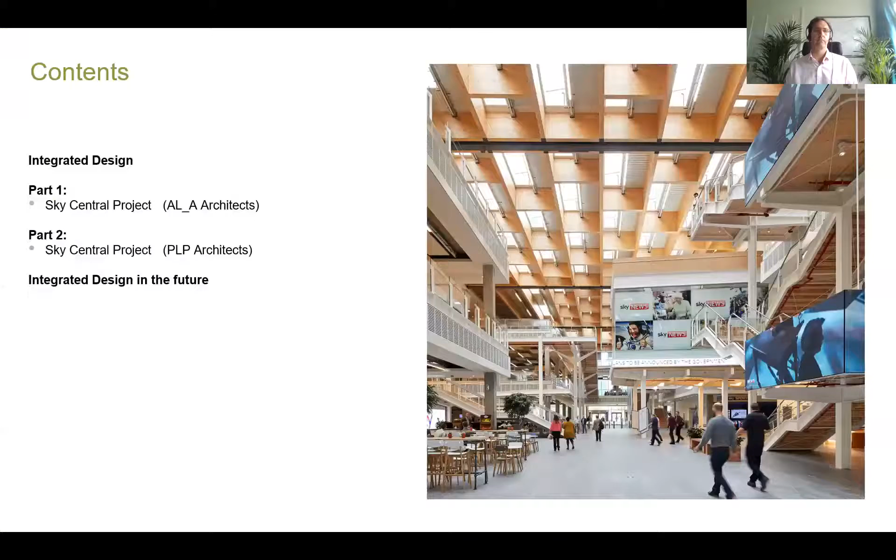For Vaz and I, integrated design has got to start with Ove Arup, the founder of the Arup practice. Ove, as well as being an excellent structural engineer, was also a passionate philosopher. Ove Arup delivered a talk in 1970 to the founding partners of the firm, a time when perhaps integrated design was less common in construction.

In that talk, he was responding to the collective desire for all the facets of the firm to continue to work together, despite the changes that would occur in time as each founding partner retired. In that speech, he refers to both integrated design and total architecture.

And the particular element I like is the term total architecture implies that all relevant design decisions have been considered together and integrated into a whole by a well-organized team empowered to fix priorities. This is an ideal which can never, or only very rarely, be fully realized in practice, but which is well worth striving for, for artistic wholeness or excellence. And excellence depends on it, and for our own sake, we need to be stimulated to produce by excellence.

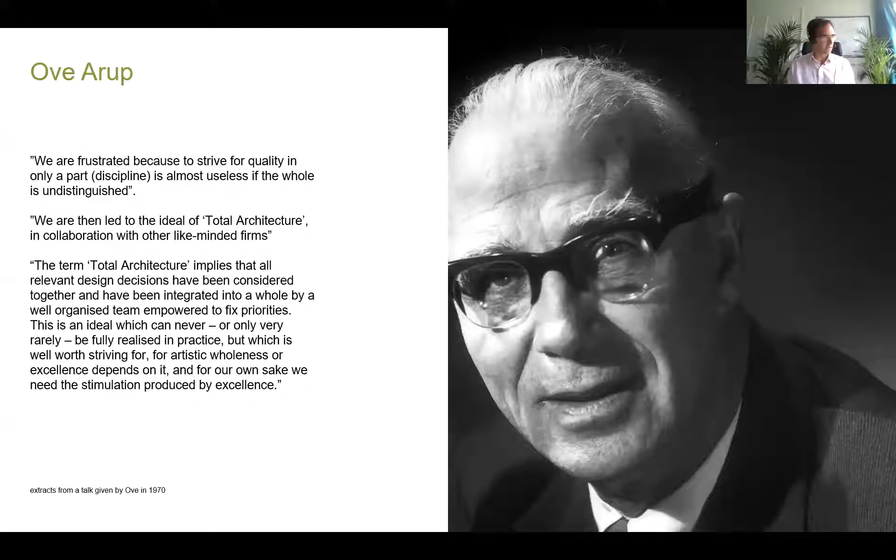So, integrated design - what is it and where does it come from? Everyone likes a great diagram, so Vaz and I considered how on our projects integrated design comes together. What is it? It's synergies, balance, whole, completeness. This isn't a universally accepted thing to have integrated design on projects - some believe that actually integrated design can be time consuming, risky, complicated, almost impossible, or slow.

It's important, therefore, that integrated design or total design delivers outcomes that are greater than the sum of those individual parts. I'm sure over the course of studies those on the call have come across studies on integrated design. Vaz and I thought we would share and capture the key components that are fostered on integrated design on our projects, which come through on this diagram.

We feel it's important, first of all, technical skill - to be the best that you can be as an individual in your core discipline. Be creative and innovative. Treat each new challenge with an open mind, not burdened by one particular solution you may have come across on the last project or otherwise. That doesn't mean forgetting your experience and knowledge gained over your career or past projects. Strive to come up with the best solutions for the brief, have ownership for the proposals that you make, and don't be frightened by innovation.

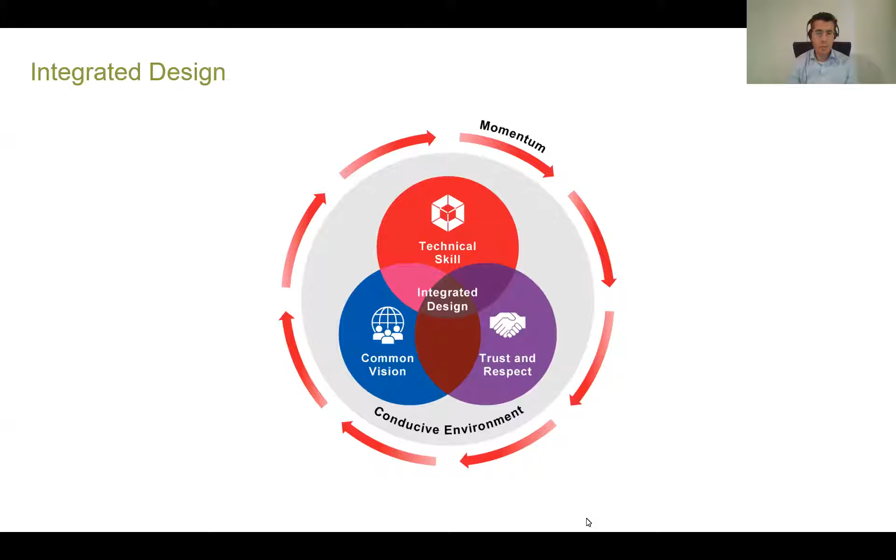So, Sky Central is a project we completed a few years ago, and we would like to share with you the design journey, and how the integrated building design concept was formed.

Our client, Sky, has spent 27 years making TV. They were first to offer digital TV, and now have over 34,000 staff in over 130 locations. They have been investing in making places where people work brilliantly across the UK and Europe.

But in Osterley, where they are currently located in London, is their headquarters. It is where 'Believe in Better' started, their motto, their slogan. So they wanted to create a headquarters that everyone, no matter where they are based, could be proud of.

So why was integration so important to visualize that vision? Because the client, Sky, have complex needs which sometimes conflict with each other. So the question is how we can satisfy those needs in a seamless way, how we can maximize the potential of the client's vision, and how we can enhance each other's aspirations - the architects, the client, the engineering aspirations.

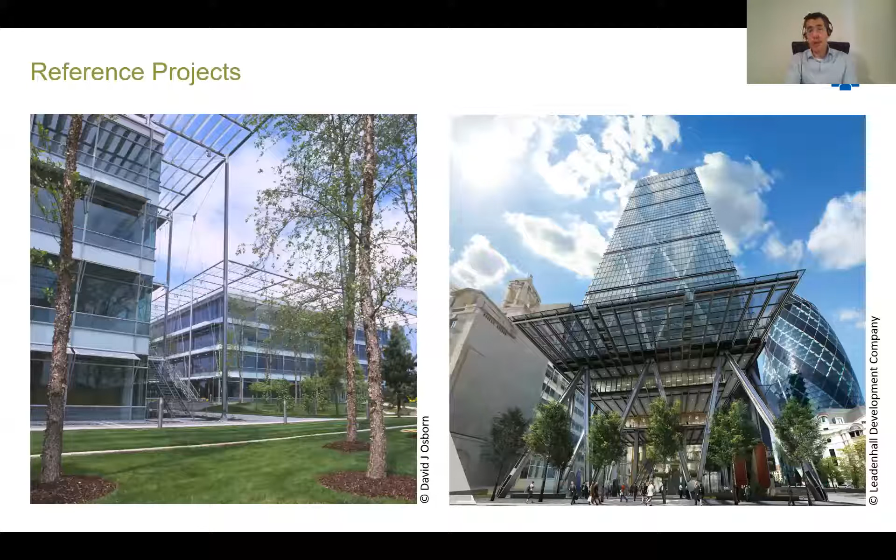What they had in mind was a Bürolandschaft type of office. Here in this image, we look at Johnson Wax headquarters, an open plan office that accommodates free and open plan furniture scattered in large, loosely and unstructured divided spaces, less rigid, with creative partitions and plans, the nature of them often dictated by the type and functions of the workers being there. The challenge was that in an arrangement like that, an open plan arrangement, it is difficult to actually celebrate the structure and conceal the services.

It's difficult to bring daylight. It is challenging to actually create a connected environment. It can look quite cramped.

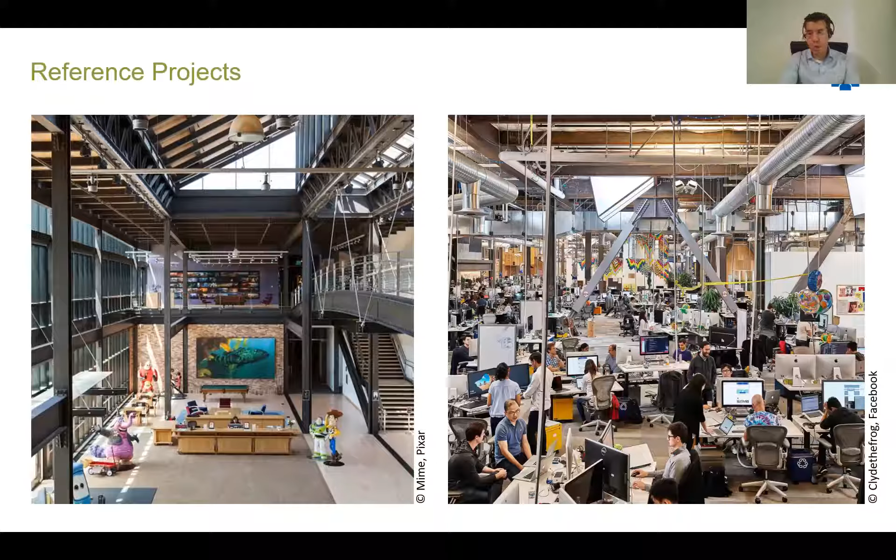And so they traveled to the States to look at similar large-scale office facilities from the creative industry. They visited the Pixar building and Facebook headquarters, which were converted factories powered from the sun via photovoltaics with daylighting coming from the roofs. Although they liked those type of buildings, they were concerned with the inhumane nature of those large buildings and the large and long floor plates.

Before going to unfold the story of the design, I will give a high-level summary of the design solution, just to give an overview. In Sky Central, we came up with a very long, but a very low-rise building, only 3 stories, a landscraper rather than a skyscraper.

We designed the largest timber roof in Europe, 16,000 square meters, which integrated skylights, areas at high level where we could collect the hot air, and 12,000 square meters of photovoltaics on the roof to generate electricity. We allowed the daylight to penetrate from roof skylights and percolate down to lower floor levels via a series of atria scattered in the floor plates.

We did the opposite with ventilation. We bring fresh air into the space from the floor and allow the air to rise up to the ceilings. By adopting this approach, we managed to clear up all services at high level, celebrating the structure.

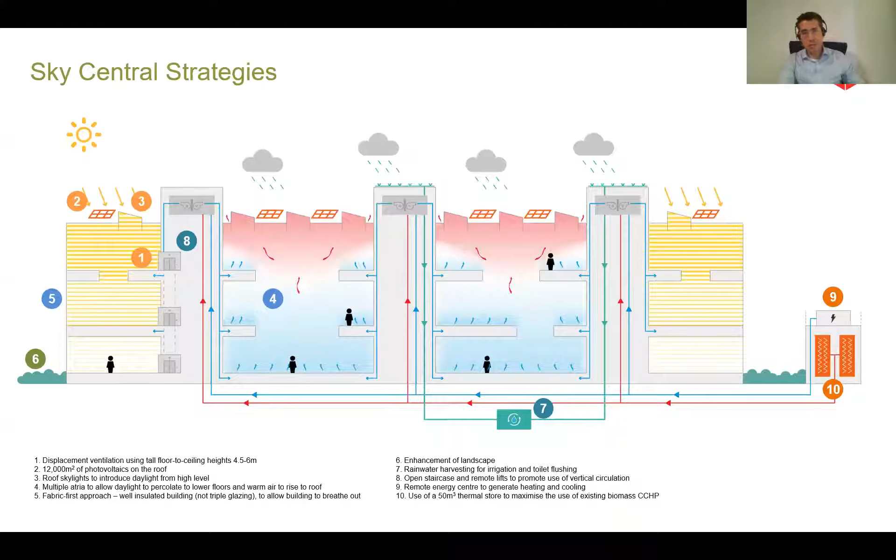We will now see in the following slides how we slowly unfolded the design of that solution. So ALA's vision, Amanda Levete Architects' vision, and response to Sky's needs and concerns was to create neighborhoods within the building to provide some demarcation for the vast landscape floors.

With that in mind, the use of atria came up to break the long floor plates, as well as to create vertical sight lines from one floor to the floor below or above. That was a vision that all design team members shared.

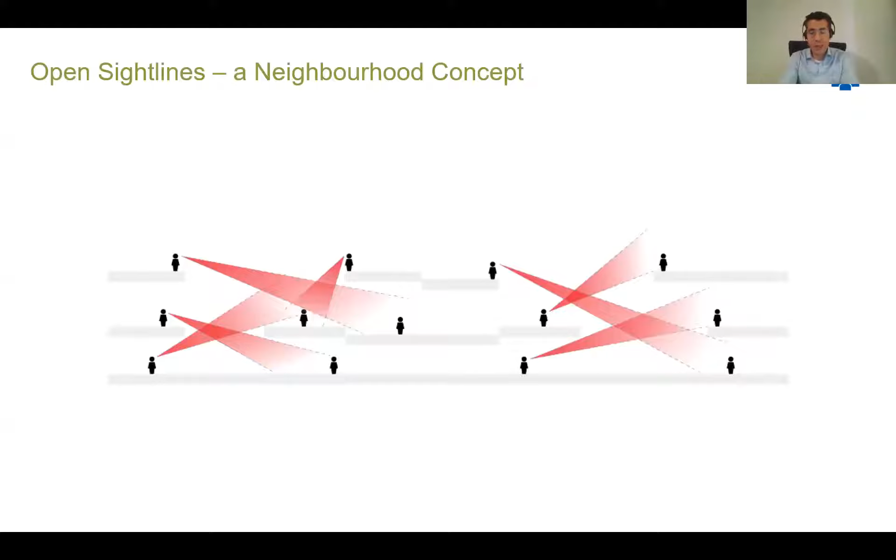In a way, it was a piece of a Jenga game of office, aiming to optimize the location of that atria to actually get the most out of daylight, ventilation, and sight lines, so provide ease of connectivity between the floor plates. And so, from an engineering perspective, the first idea is to bring daylight from the top to create

a fully daylit space at the top floor, and then utilize multiple atria to bring daylight to the lower floors. They would not be as daylit as the top, but the idea is that every floor has access to daylight and is able to see the sky.

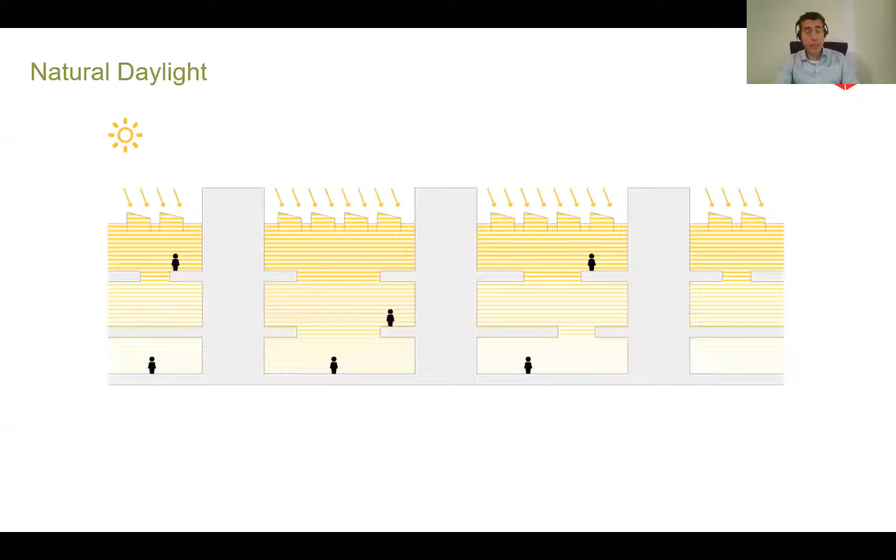Punching skylights through the extensive roofs allows maximum penetration of daylight into the building, providing even dispersion across the floor plates, as we see in the next slide. Floor openings are distributed throughout the first and second floors, increasing in quantity as one ascends the building.

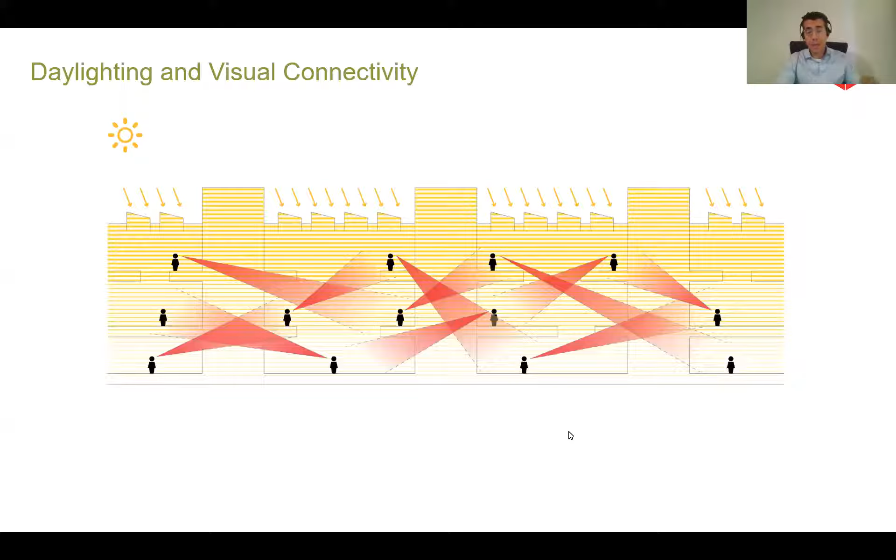In the next slide, we see here how these atria permit visual connections across the large expanses, vertically as well as horizontally. Moreover, it allows the natural daylight from the roof lights to percolate down through the roofs, through the floors to the ground floor.

The next challenge was that in an office space of a TV broadcasting firm serving 3,500 people, the workstations are heavily used. Each employee has 3, 4, sometimes 5 screens, which generate a lot of high internal loads. And that poses a significant challenge on how to serve those desks.

This means that the floor void was pressurized with air. The displacement system would then be responsible for dealing with heating, cooling, and ventilation, and therefore it removes all HVAC services from high level.

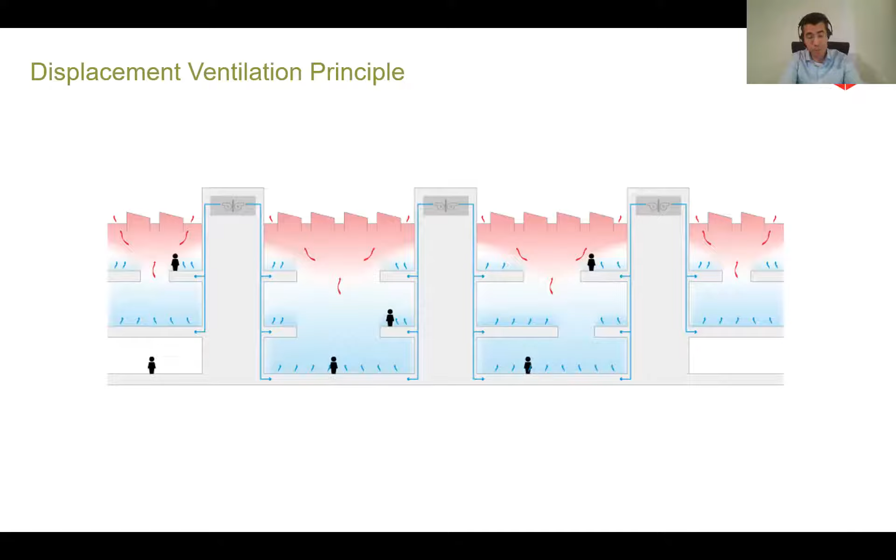From an architectural point of view, tall floor-to-ceiling heights are desirable to optimize the proportions of the long and deep floor plates, and they help with vertical sight lines from one floor to the other. The engineering principles we put forward enhanced the architectural design intent by augmenting the volume and height of each floor plate, so architecture and engineering came together and worked seamlessly.

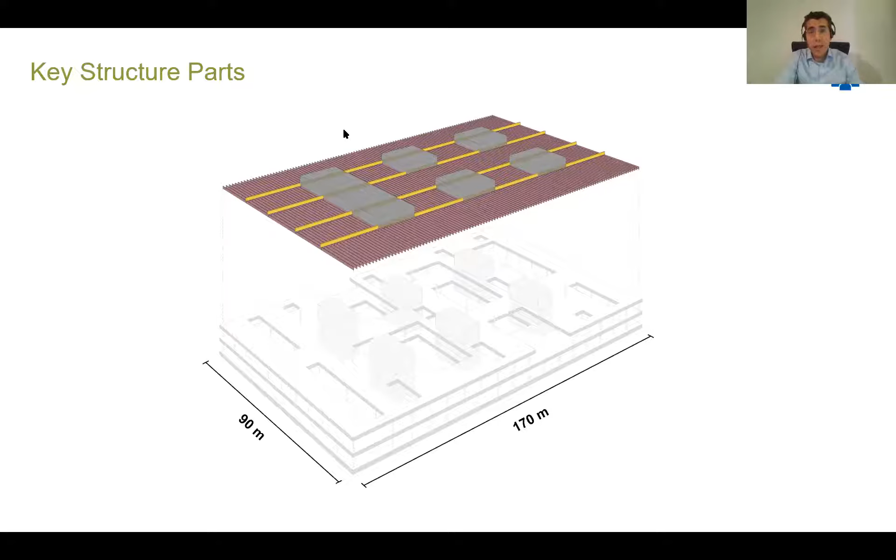The idea, to bring it back to the principle, was to create a long and deep office building, 170 meters in one dimension and 90 meters in the other. The structure played a key role in achieving an integrated low carbon design. We designed a concrete structure predominantly with 6 concrete cores, which played a fantastically important role in the success of this building.

We also designed flat slabs. The roof structure is formed from glue-laminated timber beams spanning approximately 20 meters, allowing for large column-free areas on the second floor. So here we have a combination of a lightweight roof with concrete cores to accommodate services and plant rooms at the top of the cores.

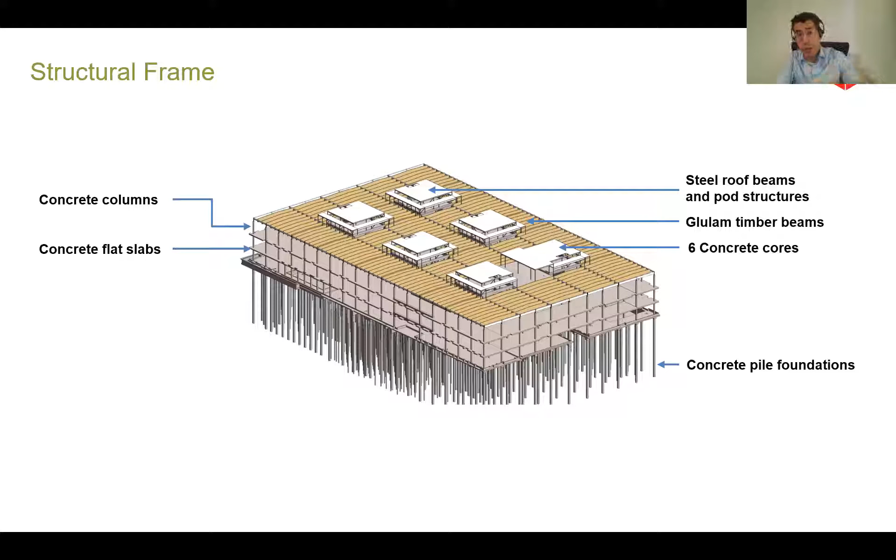Another important design moment in relation to the structural design was how the services would be integrated with the structure. We looked into many options during concept design, but eventually narrowed them down to a composite metal deck with primary steel frame structure on one hand, and a reinforced concrete option with flat slabs on the other.

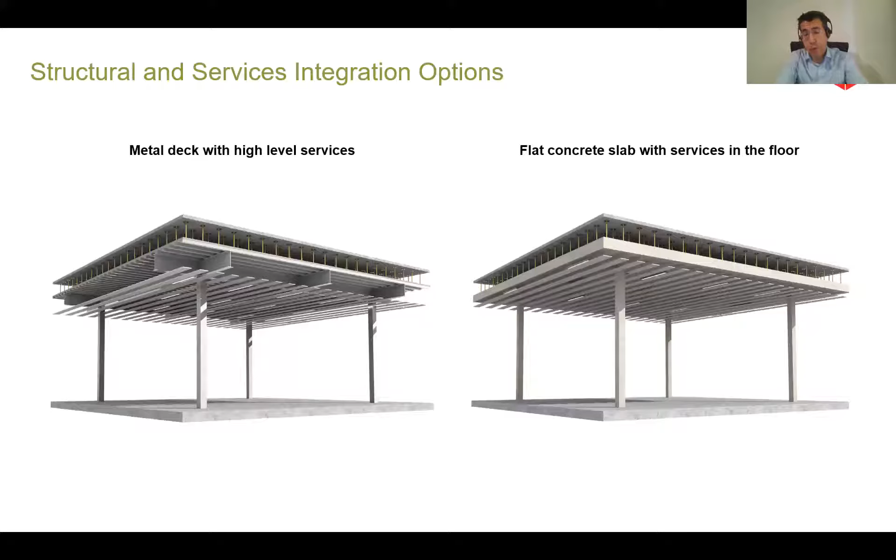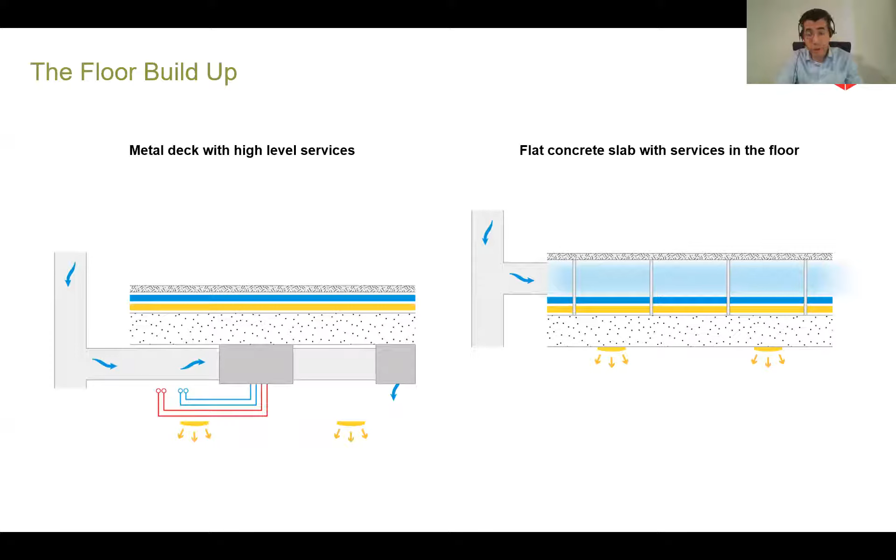A metal deck solution has a deeper structure and works well with building services at high level, a more conventional solution. With a concrete flat slab, services running in the floor voids work more seamlessly. Due to ease of construction, program implications, integration of services, and the ability to expose the structure at high level—whether the timber roof or the thermal mass of exposed concrete at lower levels—the flat concrete slab solution was preferred.

This was an important moment in the design integration journey, because it allowed the low-level services to celebrate both the timber glulam beams at the roof and the concrete floor slab.

The next thing we needed to look at was the core arrangement. The cores play a very important role in our design. The key idea is to open up the staircase to the floor plate, creating an open, single fire compartment throughout the entire volume.

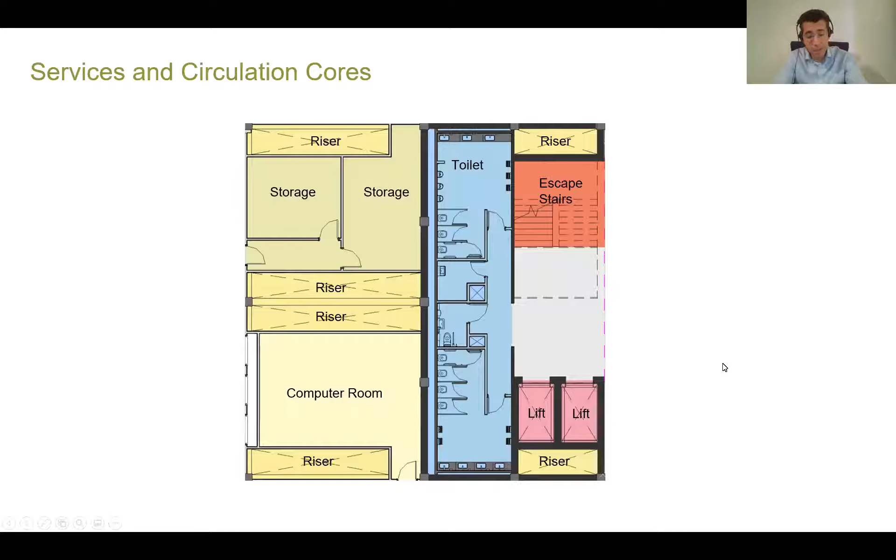On defining the core locations, the volumes of the core are separated into a public and private arrangement. At the far back end is one of the main cores of the building. The public volume serves the stairwell and lifts, providing open double-height spaces to create strong visual connections from one floor to the other. The cores also accommodate all vertical services distribution as well as back-of-house spaces—the white walls we see at the far back are back-of-house spaces and risers.

And so that allows the whole floor plate to actually be dedicated to the employees, to Sky employees, to the users.

To conclude, that was a design journey during concept and scheme design with a design team which shared the same vision. There was a lot of trust amongst the design team members and the client to develop innovative and progressive ideas using extensive testing and modeling to prove the technical feasibility of those options.

So we created a building, a quite deep building, which was also day-lit. We worked with a ventilation system that functioned for both architecture and engineering, and managed to maximize the volume and height of the buildings to improve the perceptions of the occupants. The structure and services coordination worked seamlessly to satisfy the architectural design intent, and we engineered the cores of the building to concentrate all services within them and free up the floor plates.

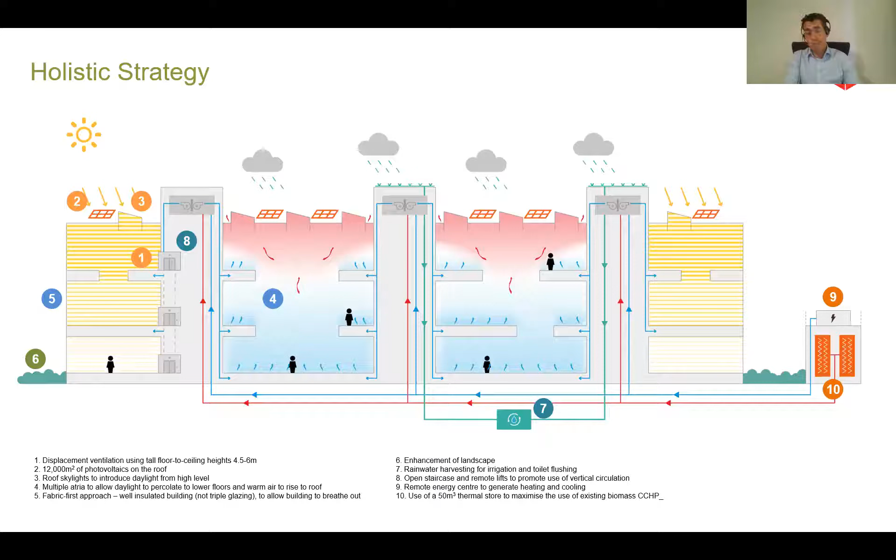So my last slide before I pass on to Darren: the design had been developed sufficiently at that time, towards the end of scheme design, for the client to have sufficient trust and confidence to take the project out to the market and tender it. Now we'll pass to Darren, who will explore how the design continued and how the project was taken into construction and handover. Over to you, Darren. Thank you, Vaz.

Sky were truly happy with the scheme that Vaz and the team with ALA had created, but as Vaz explained, some circumstances had changed within the Sky organization, which meant there was an eagerness to try and complete the headquarters building ahead of time. So Sky appointed their own in-house development team and decided to accelerate the procurement and construction.

They invited two contractors, as Vaz mentioned, based upon the early stage concept information that the ALA and Arup team had created. By the time they'd reached scheme design, Mace Construction, along with PLP Architects, had been appointed as the design and build team. Arup were to be novated across on completion of the scheme design - novation being a means for Sky, the client, to transfer the engineering team from the ALA team across to Mace and PLP as the development and construction team.

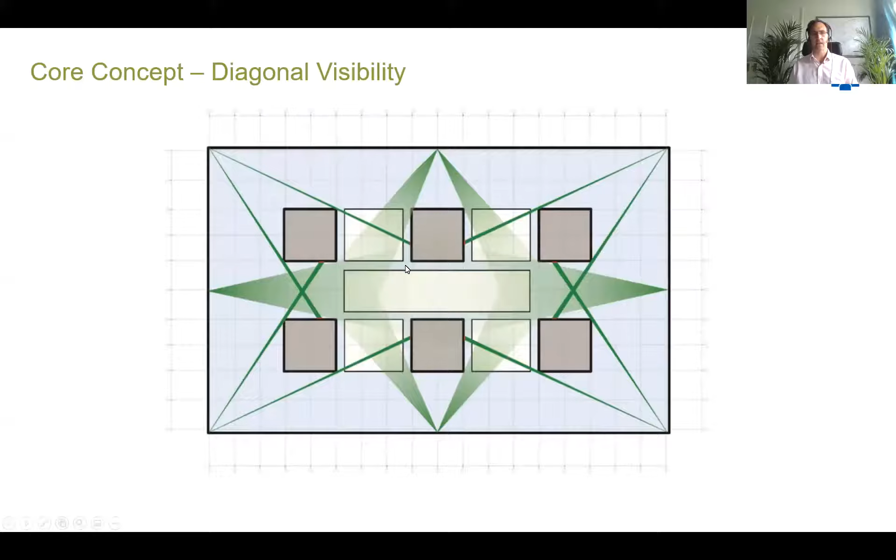The ALA scheme promoted inward, cross-floor and between-floor views through the town square in the center of the building, with a wonderful simplicity within that concept. PLP wanted to broaden that visual connectivity to create diagonal views across the building, extending more than 100 meters.

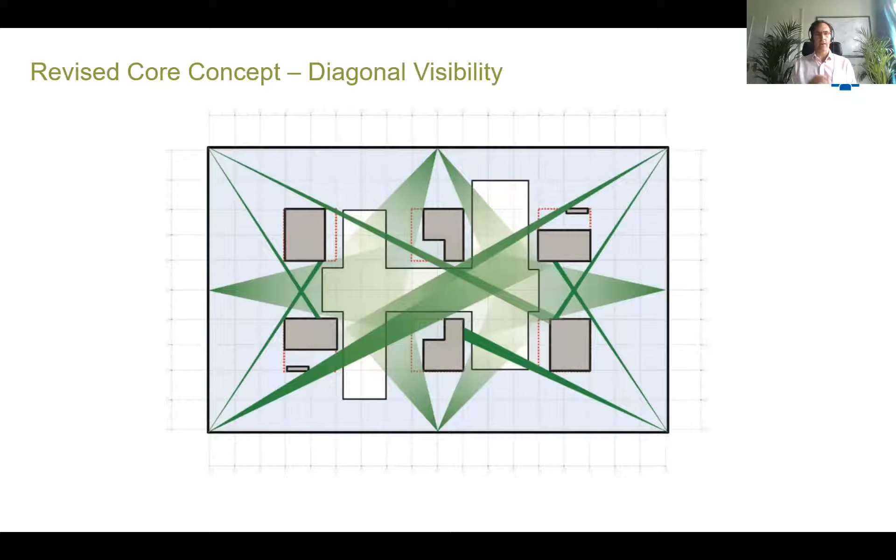This was one move that created a new vision and a further turning point for the building, the start of a new journey. The realization of this could only be achieved by significantly reducing the cores, represented as the grey squares on these diagrams, with the vision represented in the green views.

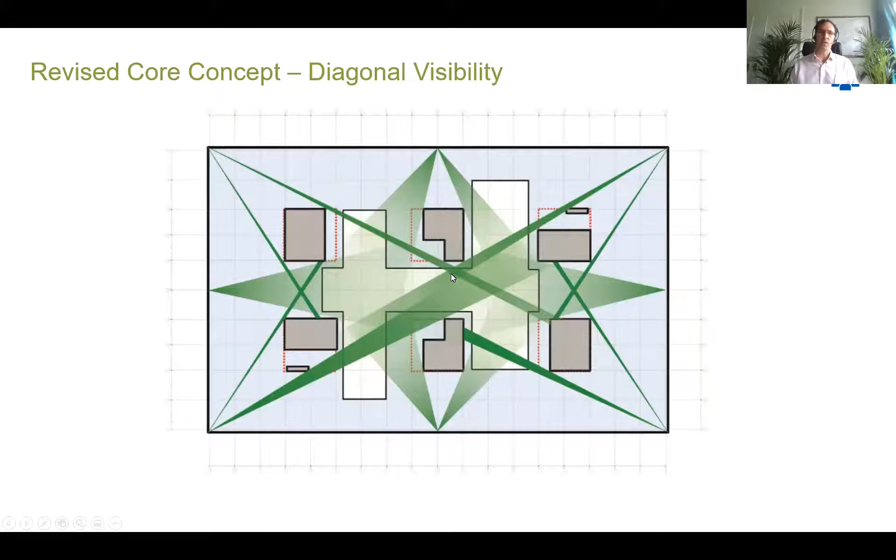So to reduce the core, what was in them? As I mentioned, there was a wonderful simplicity of the 6 cores across the building. They contained the building services, the vertical circulation, toilets, welfare facilities, storage, and Sky's important resilient data and technology services serving all the office floors themselves.

And the key was that the cores, although open, were also providing the means for all 3,600 staff on the office floor plates to evacuate. They were evenly spaced and well spaced out, which again provides a level of resilience for people to evacuate the building in the event of a problem.

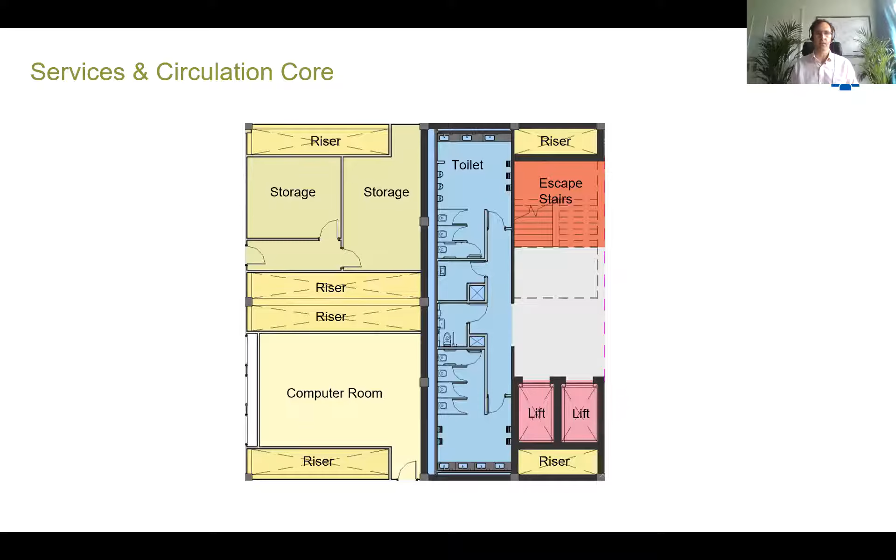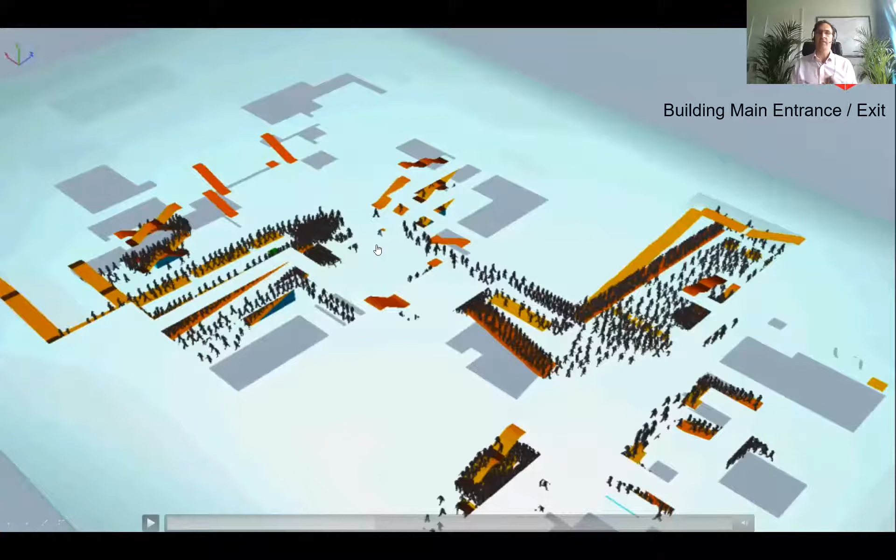This early evacuation model begins to indicate how Sky staff would move across the floor and down through ramps and stairs to escape the building. And this fire engineered approach,

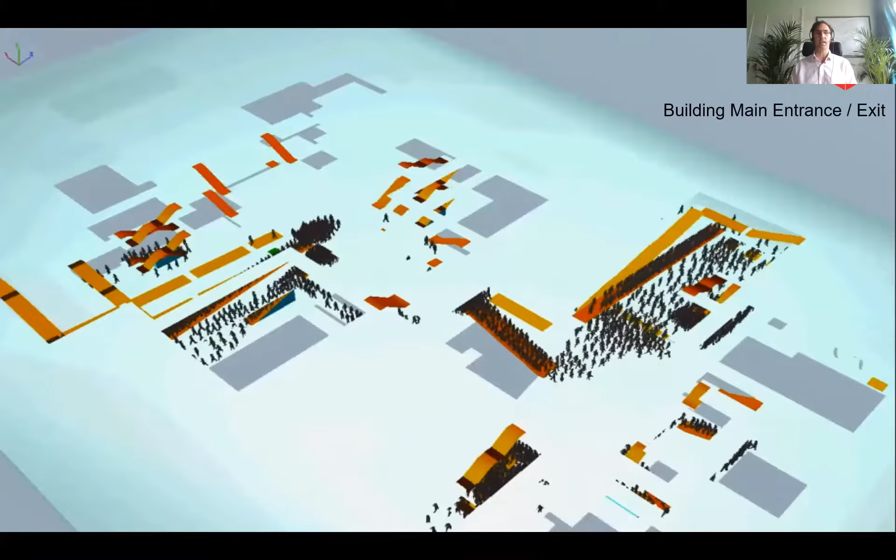the evacuation model was to simulate how people could evacuate the building. At the same time, we had another model, a computational fluid dynamic model representing a fire generating smoke. The key strategy for the fire engineered approach was that everyone needed to be able to exit the building before smoke would obscure the evacuation routes, which were all now centered within a single central atrium space. So this pioneering fire engineering approach unlocked the solution of being able to take the stairs and lifts from the cores into a common atrium area.

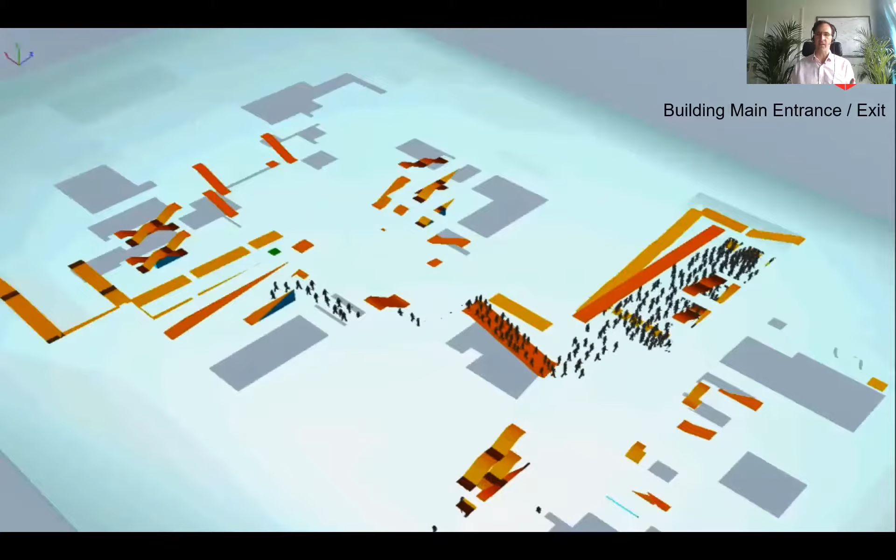And this was largely embraced by Sky, largely through engagement. It was of benefit that the health and safety manager at Sky had worked in airports, and so understood the principles of horizontal evacuation, and was confident that Sky as an organization could put in place an effective management plan to allow people to safely escape under those conditions.

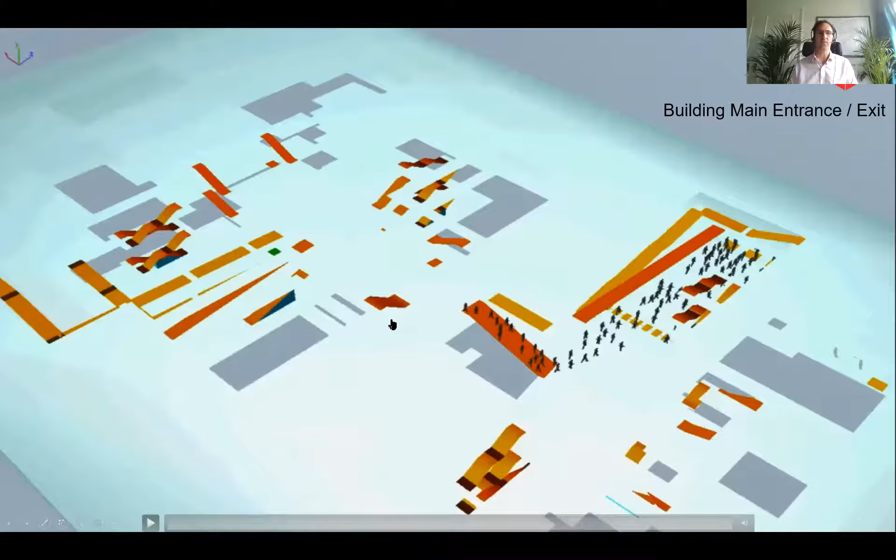And so this principle was agreed, and the realization of this new vision needed to draw upon the highest level of skills, not only from the fire engineer, but also from all the members of the team and the client organization themselves.

So the reconciliation of the design needed to draw upon the highest skills. This included the HVAC needing to be rationalized, as the vertical services distribution that was introduced ultimately needed to be condensed down. That meant rerunning thermal comfort models and reappraising the displacement ventilation.

The daylighting and the lighting scheme were retested, and we integrated additional roof lights to elevate the lighting levels within the central atrium space, to penetrate further down into the ground floor. The acoustic consultant was challenged by the openness and the line of sound propagation through the building, and so we developed responses to tackle that.

And the electrical engineers, in delivering a fire engineered solution, enhanced the existing fire alarm system and smoke detection system with a dynamic fire evacuation signage scheme, allowing the first implementation of this in any commercial building in the world, where you can use the evacuation signage to direct people around the building to help that evacuation process.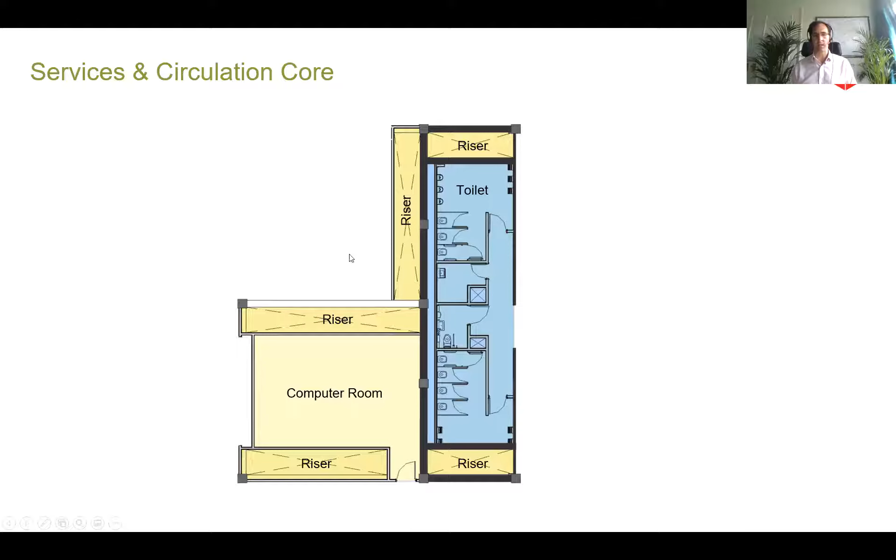So each member of the design team took on the challenge, and there was great trust that those concepts identified as a team at the early stage within the vision could be realized through the design. And the shift to the smaller cores allowed the fire escapes to be located inside the atrium,

giving staff even greater visual connection while circulating around the building. And the volume in the atrium allowed ramps to be introduced and stairs to be elongated, increasing the probability of chance encounters and the serendipity of those encounters, which was founded within that original brief.

It allowed disabled people to traverse floors without the use of any lifts, and made the office an even more inclusive workspace. And those visual connections within the building across the atrium

allowed the hierarchy to be completely reprioritized. So we moved the lifts away from the entrance point of the building deliberately, to prioritize the use of stairs, to encourage people to use those stairs and ramps to promote exercise and well-being.

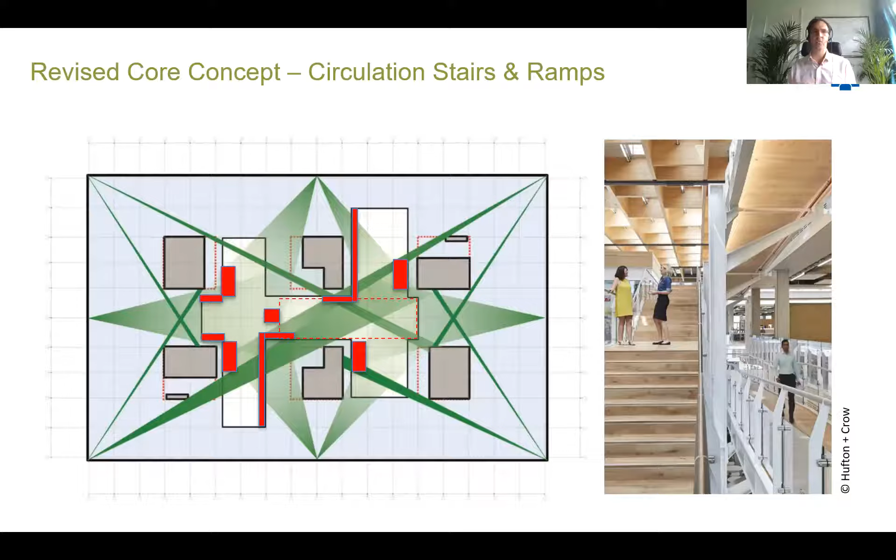In fact, 5 weeks after we'd finished stage 3 design, the foundations and piling actually commenced on site. So we entered a stage where design and construction ran very much in parallel, with the design being prepared and finalized just in time for it to be effectively implemented at a construction level.

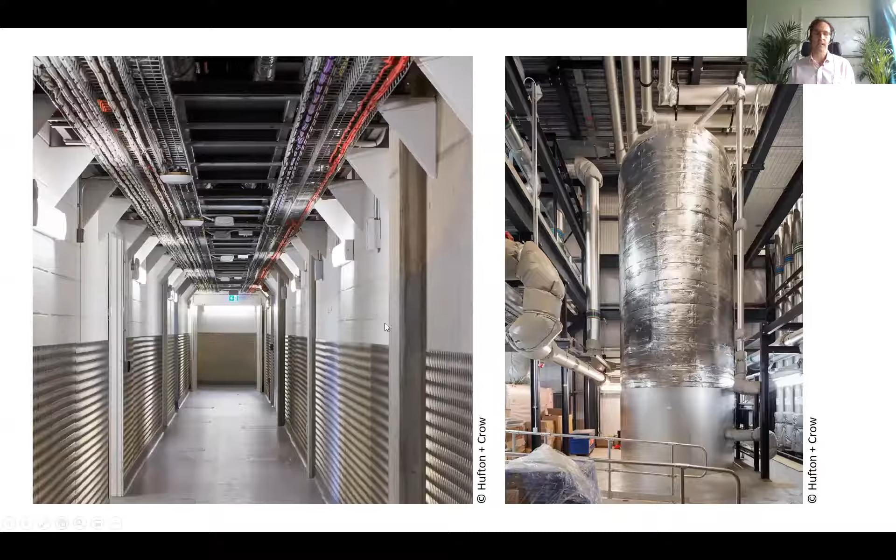This collaboration with the contractor allowed us to also explore opportunities around prefabrication techniques, and within the final design we integrated multi-service corridor units. The whole of the energy center that supports the development and harnesses heat from an existing energy center was modular in construction, again taking advantage of the collaboration with the contractor, but also accelerating the construction program.

And that extended through to the roof. The glulam beams total nearly 6 kilometers in length within the building, saving up to around 2,000 tons of embodied CO2 carbon compared with a conventional roof structure.

These all allowed us to complete the total construction within 25 months from breaking ground, which is quick for a building of this scale. And then 4 months later, we had completed the Cat B final fit-out of the building for Sky, ready to move in.

Baz introduced the sustainability criteria. We realised the brief, achieving a 50% improvement in reduction of carbon emissions against building regulations at the time, and better than the current London plan.

We repurposed the waste heat that was being generated by a biomass CHP plant on site, harnessing that and utilizing it within our development, both to create heat but also to repurpose it through absorption to create absorption chillers for cooling the building as well.

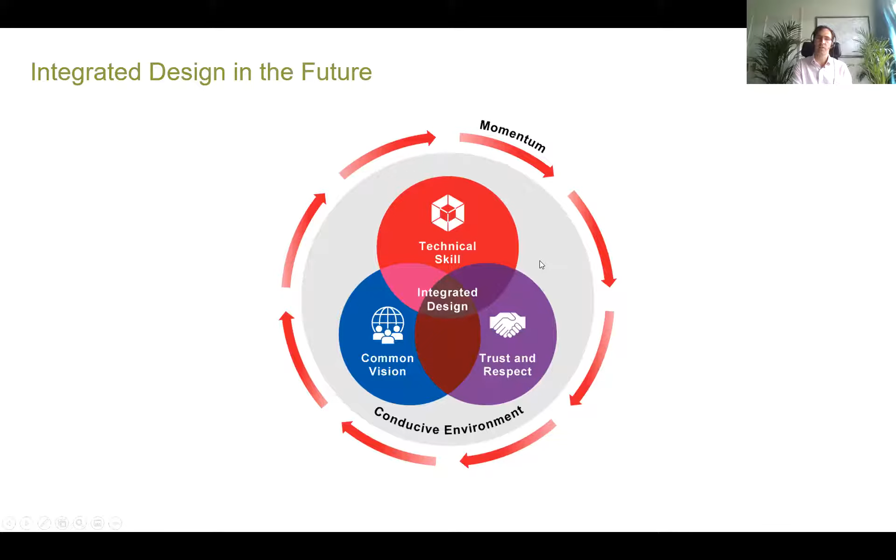And then time and momentum. The pandemic has demonstrated the fragility of mankind, and perhaps climate change is silently impacting all of our communities. Integrated design is time bound - we need to continue designing solutions that will allow mankind to share the planet with all of its indigenous inhabitants. So it's a great opportunity. We could say integrated design has moved us from qualitative value to a sustainable necessity. For our own sake, we need integrated design to stimulate and produce excellence, which we all should continue to pursue.

So I hope that's been of interest, and I guess I open it back to you, Elizabeth, for any questions or to the floor.

Thanks, Darren and Vasilis. It was great. We do have a few questions to start with - a couple from Stephanie Gauthier. She asks, they're both related to individual environment and control. The first one is about the acoustic comfort at those desks in the open spaces, and maybe related to that is how those desk spaces were allocated - hot desk, permanent - how much control did occupants have over their personal environment?

Shall I take a bit of that, Baz? Part of the brief was to help create a more agile way of working for Sky. There are something like 5,400 workstations across the building, some allocated as dedicated workspace, but only 3,600 people in the building at any one time. So there's an embracement within Sky's organisation to choose locations - selecting the right place to work for the right activity you're doing. But the overarching structure is that they're in communities that can continue to engage in particular workflows or projects together.